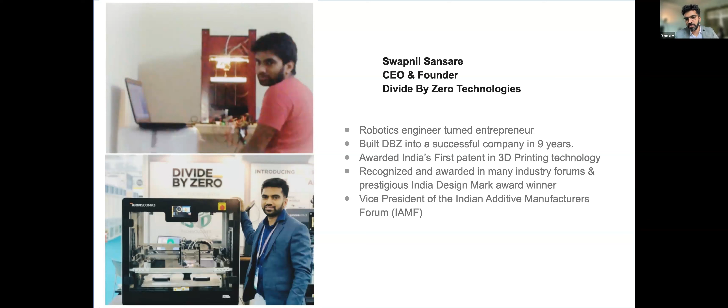We've grown, right from this humble start, first machine, to now more than 1,100 machines all across the globe. We are the first company to export 3D printers from India. In terms of machines and 3D printers, last 10 years, we have grown from a team of 2 people to 30 people. We have around 18 channel partners and 1,100 amazing customers.

Obviously this is not possible without my team and strong backing of my team. Our vision is to accelerate world's transition to on-demand sustainable manufacturing through innovation in 3D printing. We constantly are innovating. We have been doing a lot of things. We have failed, but we keep on trying, and we have also succeeded in many ways.

It is said that success is built out of small failures when you learn and take lessons out of that. But these are some of our success stories. You must be knowing these companies: Hero MotoCorp, Whirlpool, L'Oreal, maybe many of the DRDOs, Wipro, Godrej, Tata, Ola, Samsung, and all that, and 1100 more, I would say.

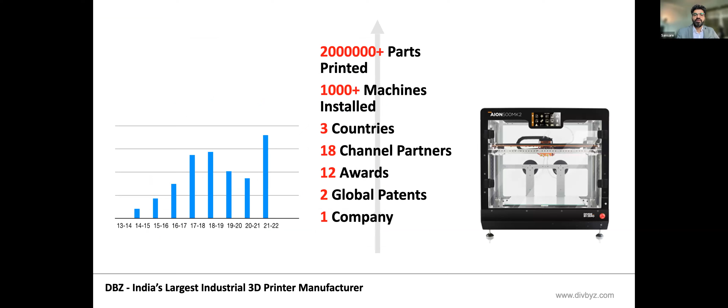And this is a story of one company, one idea that was started, and today we are here with around two global patents. Another two are basically coming through. So a lot is happening. But while all this was being done, and all these customers, we were backed with joint development programs through a lot of education institutes, and that's why we are here, what we are doing.

Today, my effort is all about igniting that one spark in some of you 60 here, including me, so maybe 59. It will be worth it if I can ignite that spark in just one person out of you. So what I'm going to tell you all about is 3D printing, which I assume you all know about since you've signed up for this webinar.

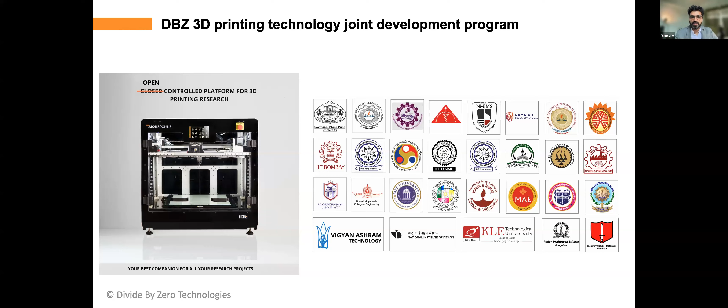So quickly moving to my first question: do you believe that 3D printing and robotics will completely replace traditional manufacturing methods in the future? Yes or no, what do you think? You can type in the chat box. Aman says no, thank you Aman for replying. Do you believe 3D printing and robotics will replace traditional manufacturing methods in the future? No, okay, no.

Okay, I get a lot of no's. Amazing. It will support but not replace. Yes, Kiran. Yes, Mirza says complement. Sumit says not economic, not completely. Okay.

I heard one of the biggest VCs in the US say that when the refrigeration revolution happened, the companies that manufacture or have refrigeration units on rent will not make money, but the companies that make products that are refrigerated and sold through this method will definitely make money. You can see many ice cream companies, beverage companies, so many companies. It's not the ones using or making the technology that get benefited the most, but the ones making the end product out of the tech that get benefited the most.

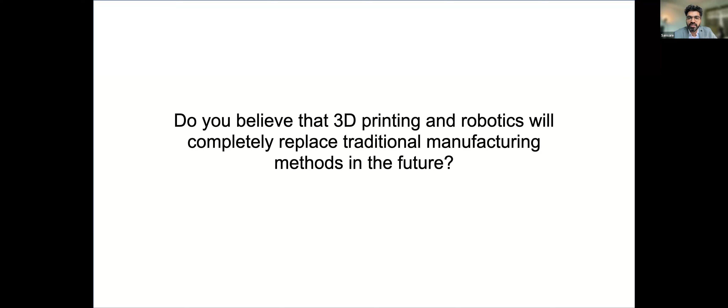Coming back to the question, yes, it will complement right now, but the way it is moving, even I have a question in mind. I'll quickly show you some possibilities, because I know many of you are here to understand what are the applications, what is he going to say, what does he know that I don't. So let me just share what I know.

This is one of the first examples. We are going to walk through some commercial and industrial applications of small batch manufacturing and where 3D print farms will make sense. Right now I'm walking you through commercial applications, then I'll walk you through industrial applications also. So this is the first application coming your way: this is about 3D printed lampshades. Just have a look at the video, I hope my screen is visible.

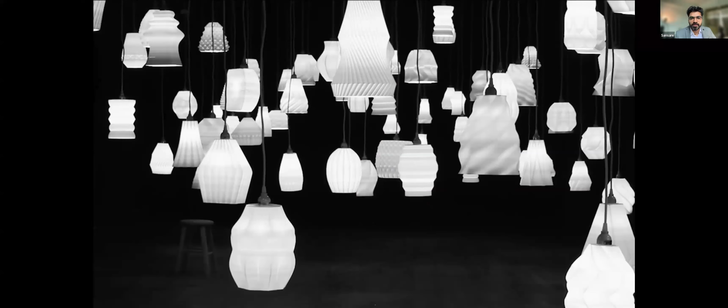Yeah, was this good? First example, first idea. There are at least 12 companies. Thank you, Kiran, for replying. Thank you, Shruti, for replying.

There is another billion dollar market, which is about the shoe and sneaker market. I'm going to walk you through a story of a company called Zellerfeld. For this, I'll have to stop my screen share and go back to my screen here. Just a second.

This is a huge market, a huge wave that is coming in. My idea here is to spark something so that one of you takes this as an idea and starts innovating. So this is one example.

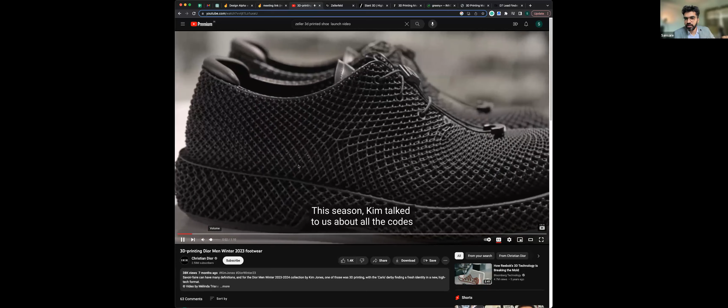Not only these guys, but if you know this company, Dior, one of the largest fashion brands, even they have tried their hand at 3D printing. Again, this is done through different technology. But today we're talking about the basic FFF or FDM kind of technology where you can start on bare minimum.

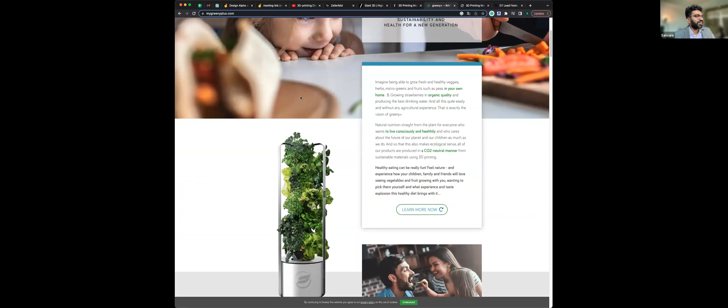These guys make hydroponic farms. Basically these are all 3D printed, using sustainable materials, recycled materials, and this company is doing wonders. They'll soon be listed in Europe. They are creating waves. Again, sustainable and green 3D printing, but a crazy idea.

What are their business models? How do they sell? What's happening here, everything, what are the volumes? We can talk about this.

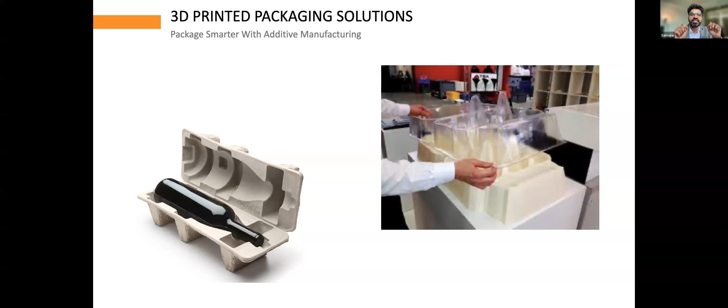Take a screenshot. Next, the drone industry is right now booming like crazy, and we've done a lot of work there with small components inside the drone. In terms of numbers this industry isn't growing much, but in terms of custom drone manufacturing they have huge demand, and it's in that initial phase where this industry is going to boom now. They need a lot of 3D printing - maybe polyurethane, maybe ESD safe material, maybe certain mounts. Huge demand there. This is another industry you can look into.

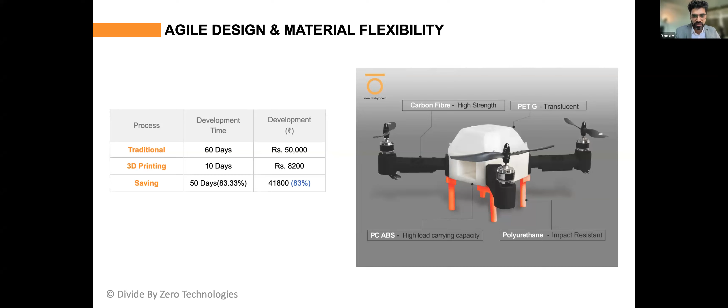Jig fixture industry, especially for automobile, electronics manufacturing, or any other manufacturing industry - we have helped at least 40 companies who are using our machines for fixturing, for assembly on assembly lines, ESD fixtures and more. They have saved almost 80-90% of money. People who implemented these 3D printed fixtures in their company were promoted twice, thrice. Huge saving here, huge gap. I don't see any company coming up and saying we can solve this problem. It's all about designing, it's all about starting up and initiating.

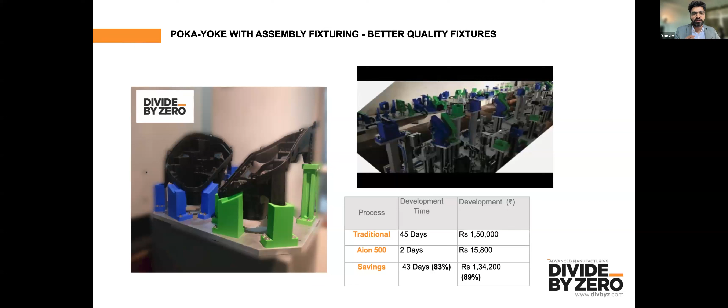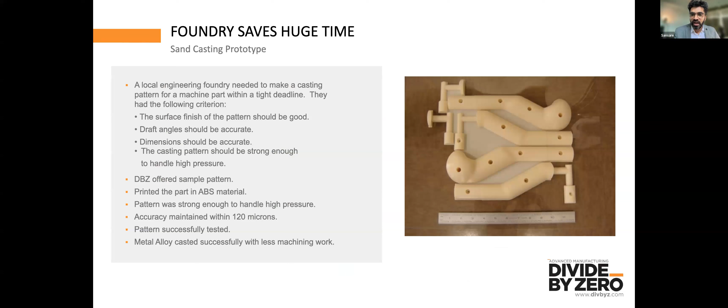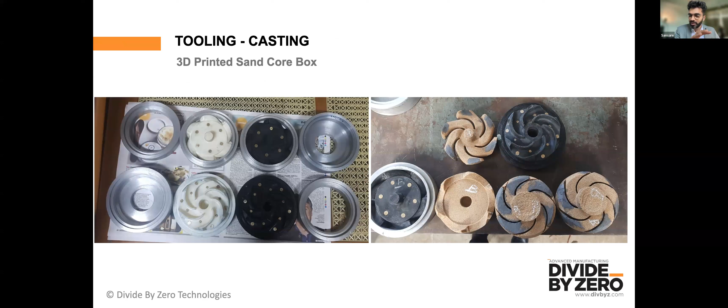This is a huge segmentation driven mostly through automobile and aerospace industries, with medical and consumer goods picking up. But a lot can be done in this.

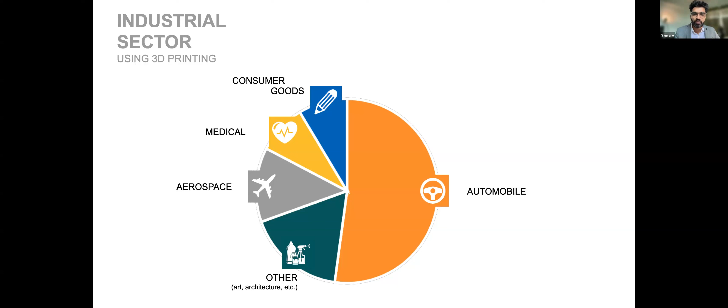For many of you, you already know about 3D printing, but some of you are new here and don't know about it. So I'm quickly going to walk you through a 3D printing process video. I know the ones who already know are losing patience, but please bear with us just a minute - I'm just going to explain the process.

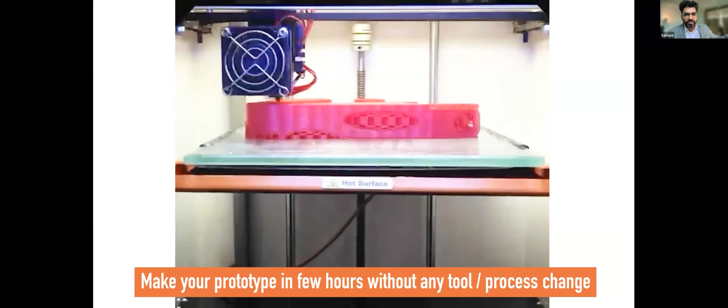So all you start with is a 3D CAD design on your 3D program. This can be made through various softwares - open source, free softwares, and expensive softwares too, all sorts. This is a time-lapsed faster video, but we have a new machine now which can print at this kind of speed - I'll talk about that later.

Your CAD design is fed to this machine, and then this machine actually makes the component in plastic. There are various grades of materials now - high temperature, ESD safe, materials with different mechanical properties, softer, harder, stretchable material, fire retardant material, and more. Many options are there - carbon fiber based materials, glass filled materials, polypropylene, PC, ABS, ASA, nylons, so many. We'll talk about that if you have any such understanding.

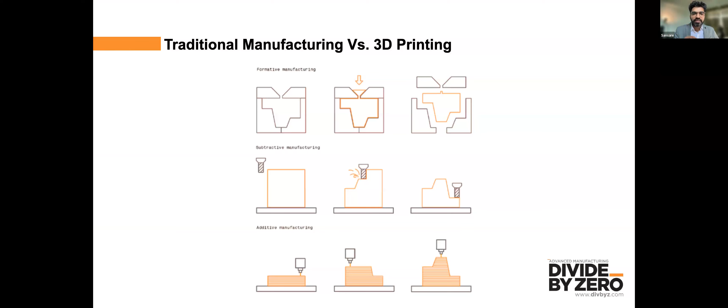3D printing is great for small batch manufacturing because between 0 to 300 or 400 components, your cost of 3D printing is going to be much lesser than CNC machining, milling, or molded component cost. That's where this technology becomes a game changer.

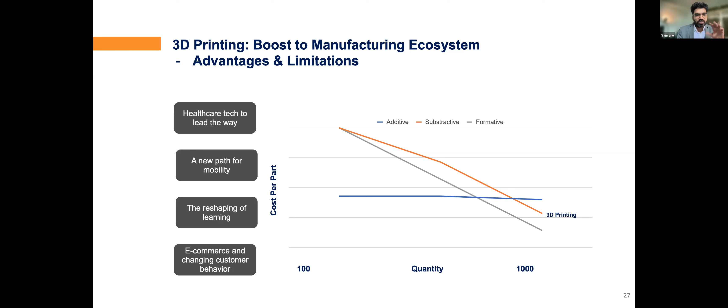We as India are slowly evolving and emerging as a manufacturing hub. I can see world's Apples and big companies looking at India, and a lot is happening. To be able to build such an ecosystem and be part of this, we also need to look at this technology - 3D printing is something we need to opt into. Typically the AM process is about pre-processing, 3D printing, and post-processing.

This is what they talk about, but it's not as easy as they say. I'll walk you through. A lot has changed in terms of the industry and what is happening, but a lot has not - still we have old methods of doing things, and that's where there's a lot of traction happening, especially in the Indian market in terms of 3D printing.

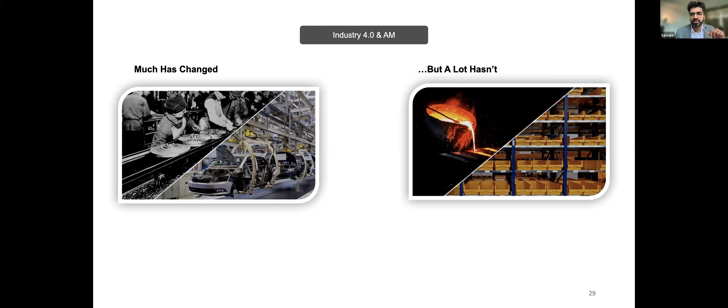I would like to understand - if you could quickly type in the chat box, in your opinion, what is the biggest benefit of using 3D printing in series manufacturing? What do you think - is it going to be cost, is it going to be time, or something else?

Faster innovation for someone, it can be a lot of new products, low volume, high margin, says Kumar. Thank you, Kumar. Creativity, yes. Ajit. Aman says the design, yes. Time, yes. Mainly cost, yes. Make complex designs, yes. Complicated designs, yes. Mass customization, perfect, Saurabh. Okay, creative and reduce cost.

One major advantage here is you don't have to keep inventory. This is a model where you can be capital free - you need minimum capital to run this business. Yeah, inner tubes which are not otherwise possible, complex designs, everything. But beyond that, the major advantage is this.

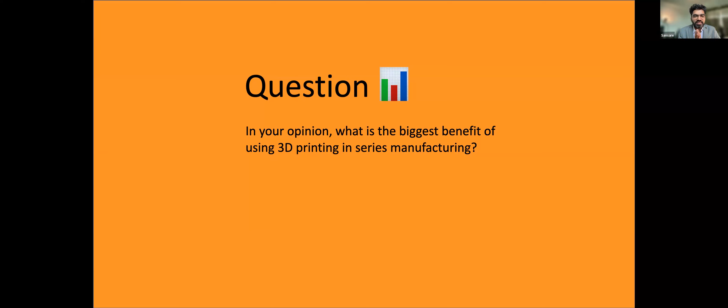What is happening in this industry right now is this is growing tremendously, and this is becoming application specific - for small, complex, and expensive parts, a lot of customers and companies are looking at 3D printing right now. Recently there was news that Apple, for their Apple Watch manufacturing, tried and tested metal 3D printing. It's a big move, and this is happening.

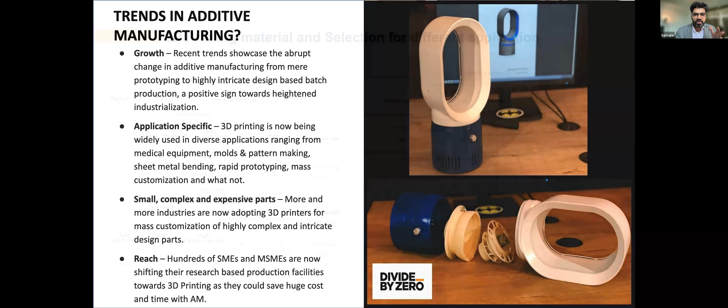Now, in terms of 3D printing, hundreds of MSMEs and SMEs are reaching out, looking at in-house 3D printing facilities. But that is not going to be enough. In this journey, it's going to be all about material selection for different applications, then design for additive manufacturing, and selecting the process - where do you go, right?

But what if I tell you this can all be easily handled? Once you know the business, once you know the product you want to build, this can be a component sitting in your organization - you're part of an organization and want to help, or this can be a component, design, or idea you've been sitting on for so many days but aren't sure how to make.

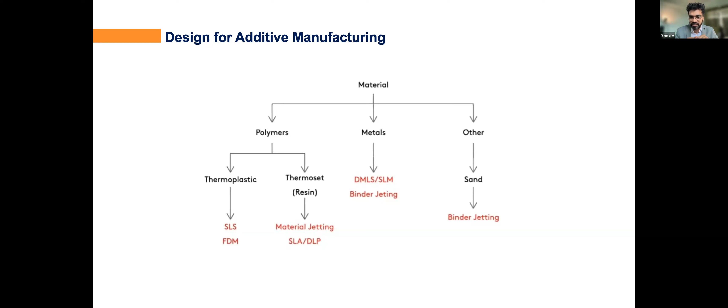So what if - one of the promises I told you - I'll help you get your designs for 3D printing without hiring designers on payroll, right?

The way this is going to be revolutionized is there is AI. Everyone knows ChatGPT, everyone knows what's happening in that space. So AI is there, and it is going to be there.

Then again, you have IoT, big data, robotics and 3D printing. These 5 industries are going to transform the $12 trillion manufacturing market in a big way.

I'm not saying 3D printing is only going to be the game changer. This is going to be hybrid - 3D printing, CNC machining, laser, plasmas, whatnot, EDM, wire cutting, every sort of technology. But it's going to be together with AI, with robotics, with IoT, with everything together.

And the advantage this is going to give you is you run inventory-less models. You get an order today, you deliver within 3 to 4 working days. You manufacture, maybe you have 1 or 2 pieces of inventory, or you don't have inventory.

More efficient supply chains, especially with COVID and post-COVID - we have seen a crazy increase in demand for 3D printing - and higher capital efficiency. Businesses are going to be lean. We all talk about lean manufacturing, but this is real lean.

I understand that you might have a lot of questions about how I will choose the material, my printer does not print good quality parts, and a lot of other questions. But we can help you. We can help you there, and we know we can help you.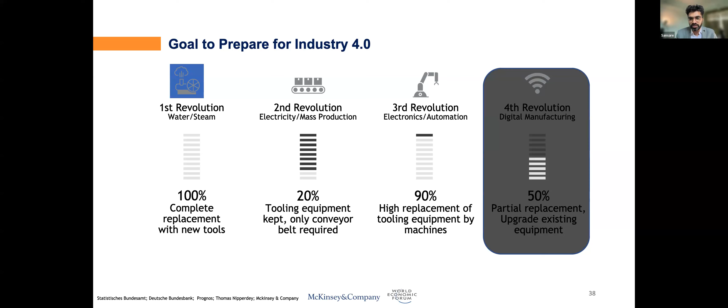And the best time to be part of any such revolution is when it has reached a critical mass, and the critical mass is now. This is the right time to get into this. When you look into...

Typically, in terms of traditional manufacturing to 3D printing, they talk about design, prototyping, tooling, then supply chain, cam and fixtures, and so many other processes. And with 3D printing, they talk about just additive manufacturing - design, print, and product. No, it's not that way.

There is a lot of help that you will need, and this will also need a lot of support, and we are here to support you. We are here to help you out.

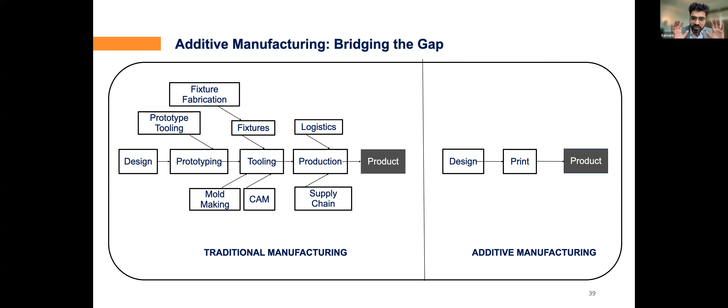So the 3D printing ecosystem comes down to your applications, materials, where you're going, what all processes you're using, and everything. And for this, we are there.

What I'm asking you is, if you have an idea, if you think you want to make this product, and you're sitting on an idea but you're not sure how, where do I get funds from, how do I run this through - this is where we come in, and we'll help you out here.

So roles in robotics and automation in modern manufacturing - this is happening. As I said, on-demand manufacturing is possible.

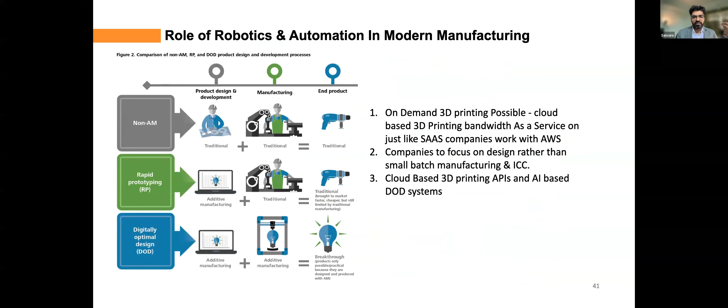So this is going to be cloud-based. Imagine a business model where you are just sitting home, and some factory somewhere is manufacturing these components for you, which is like a rack of servers.

If you know that at one point when web evolution happened, suddenly cloud evolution happened. There were a lot of companies, Amazon and companies like that, investing into servers, and they were actually storing data for you. These are computers sitting in a remote location where electricity cost is low, where operating cost is low, where temperatures are lower, so that the heat coming from these servers is dissipated.

Similarly, 3D print farms are going to take over, and these are not going to be just 3D print farms, but hybrid machine farms. So this is the major game changer that we see happening, and 3D print farms are coming. We are part of this. We are seeing this happening, and through this we want to be part of the next big story, and if it is you, we want to help you out.

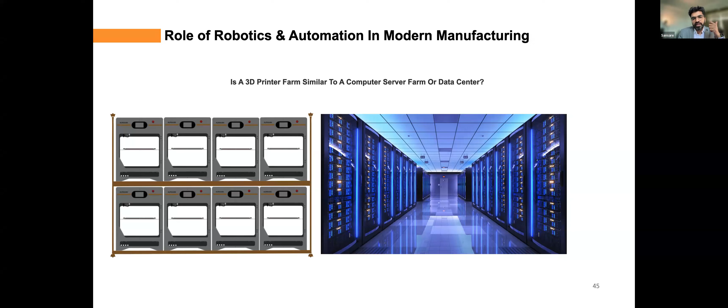In terms of this journey, one of the amazing videos that I saw for a 3D print farm, this is through an open source design machine. This is not what we have done, but this is something that we have developed for some of our customers. We have signed NDAs, so something we cannot share, but this was a generic video which was available, so I thought I'll share with you. Just have a look.

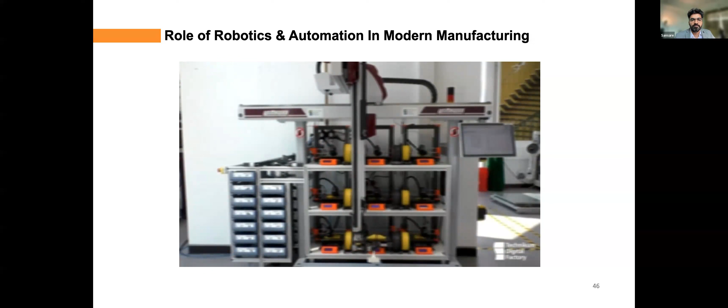So when you have these sort of farms, there are a lot of questions I can see. How do I get customers in India? Wait, I am going to answer this question in the end.

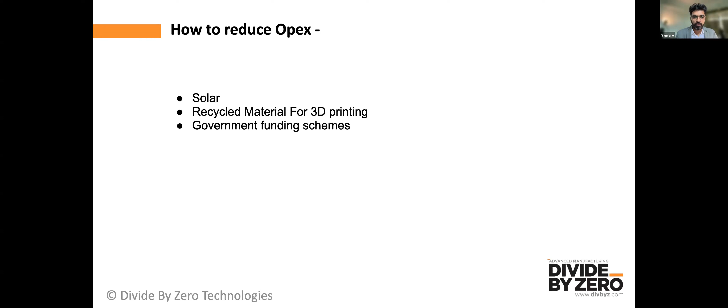And yes, a lot of government funding schemes, as I'm talking about. I truly believe the growth of the 3D printing and the way this is going, as many of you have said, it is going to be hybrid.

And for this, we have been working on certain machines, and how one of these hybrid machines look like, or what they can do, or what they are capable of is they can have 3D printing through extrusion, through heated extrusion, through pellet-based extrusion, through filaments, through gels, through concrete, and not only this, but they also have a subtractive milling head on the same machine. You also have a laser cutting head in the same machine. Even if you want any other tech to be added, that can be done. This is one single platform, and that is something that we are proud to be part of.

And we have also exported some of these machines into the US market, not only in India, but into the US market also. So I can see a lot of you are typing out questions in chat.

The creator, the artist, the innovator, the designer. Found on the shop floor, in the studio, in the lab, in the office. The one who questions, the one who conceives, who is never satisfied, who always wants to make it better. Imagining, building, breaking down, and rebuilding again, giving shape to their thoughts, creating breakthroughs, creating progress, creating disruptions. But a creator's mind is ever demanding, asking for more, demanding better features, enhanced abilities, and increased agility that seamlessly extend their thoughts and concepts and bring them into reality, on the floor or in your hands.

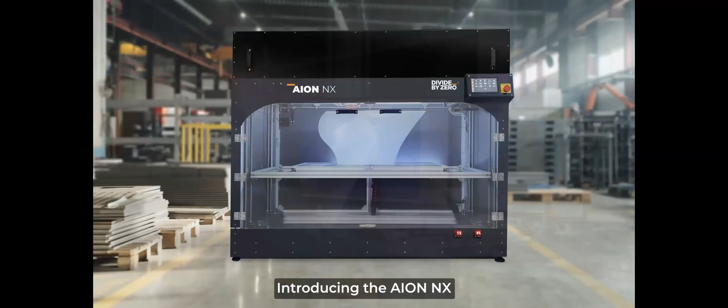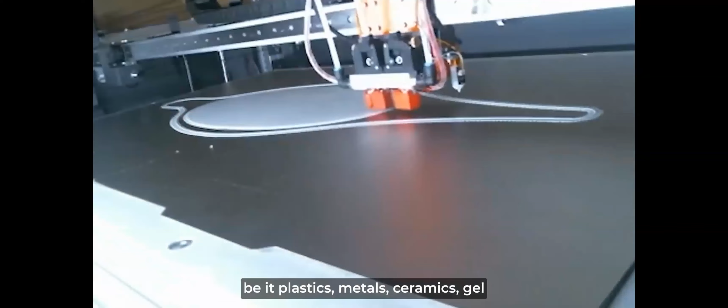Introducing the AION NX, a new frontier in large format on-demand manufacturing. The hybrid machine that seamlessly brings to life your largest designs, in the material of choice, be it plastics, metals, ceramics, gel or concrete, with hybrid process add-ons to deliver a fully finished creation, all in one platform. With one of the largest bed sizes in its class, the AION NX can deliver 5 times faster additive manufacturing throughput, up to 1 meter length in one go.

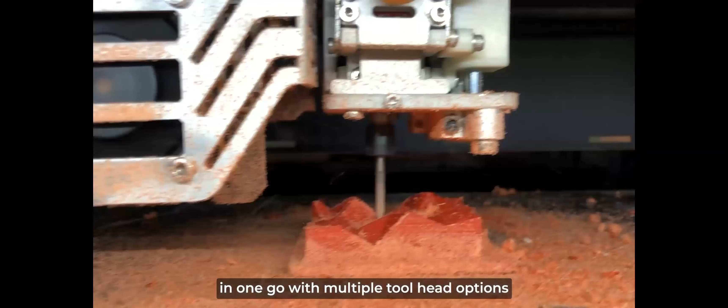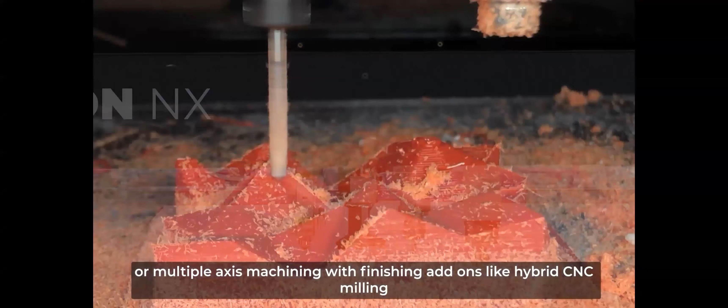With multiple tool head options, customized to your specific application needs, including pellet extruder, filament extruder, paste and gel extruders, laser heads or multiple axis machining with finishing add-ons like hybrid CNC milling head, and other automation options to deliver your on-demand manufactured components processed in one go, enabling creators everywhere, in research, new product development, aerospace, automotive and drone tech, to change the game, to create, innovate and disrupt, bringing you infinite power of creation on demand.

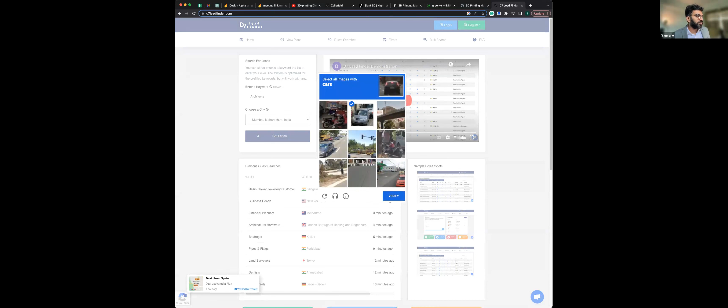Okay, Mumbai. Get leads. It's asking me to select cars. Okay, I'll select cars. So it's going to do its own work.

It takes some 3 minutes, 30 seconds time to find the leads. Till then, I'll take Q&A. I'll talk to you and I'll understand.

See, in this journey, there are going to be a lot of problems, a lot of questions you have in terms of owning machines, maintenance, electricity, choosing material, and designing. We want to be there and we want to help you out.

Okay, let me go to the question part. So there's one question: we are a design firm based in the UK, looking for high quality 3D printing partners for prototyping and mass production. Okay, wow. So please share your details, or maybe connect to us, maybe we can help you out. We already have a lot of customers in India and abroad as well, in Europe, who can help you out. Maybe we can connect with you.

Why is FDM used with SLA having much better finish, besides the machine being costly for SLA? Is there any other advantage with FDM, and why do you make only FDM printers? Any plans to make SLA machines? Yes, a lot of plans, Ankit. See, why FDM is because that is something that is breaking the barriers, and this is where the technology is super affordable right now. It will come to SLA as well, but right now this is super, super affordable. Secondly, the best part about FDM is you can use recycled material, that is something you cannot do with SLA, and a lot is happening.

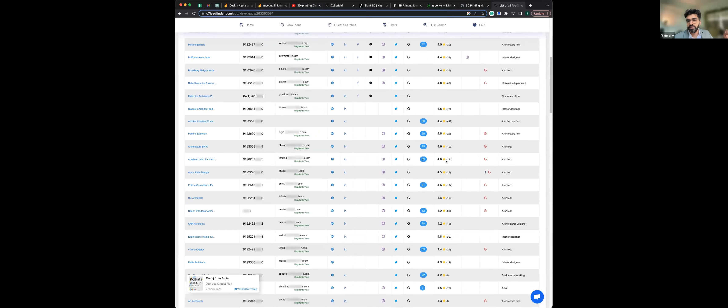So these are some 100 or 498, depending on your area and the tool coverage. But this is possible if you have liked it and want to try this. Even this has come to me as a new tool, so use it and ensure you're doing that communication with all the care.